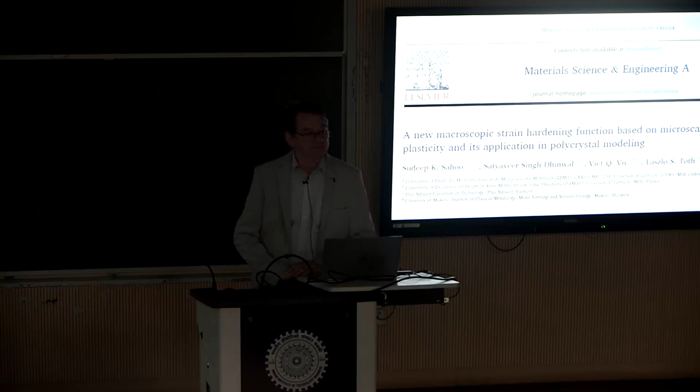So you see even the first slide, which I put on here, it begins with two Indian names. Both of them were almost 100% my doctorate students, and then they were also in my laboratory. And there is one Vietnamese and myself. Now I like to be at the end.

You know, initially, when you start writing papers, you are supposed to be the first one. But then the best place is when you are at the end, because it shows that you are directing and helping all those people who are before you. And this is what I wish you to arrive at when you become older, to reach that position, the final one, not the first one.

So I'm sorry, my voice is a little bit disturbed. And that happened during the trip. Actually, I lost my voice a little bit. I wish I lost my luggage instead; luggage is not that important, but voice in our field is very important. Well, it's okay. I'm not going to sing. I'm just talking about science.

So there will be a number of lectures, and different topics will be touched, but I was consulting Professor Suresh about what is needed here, so that we can orient it a little bit. During my research, I was dealing with quite many different subjects, so I could fit the topic a little bit to your interest as well.

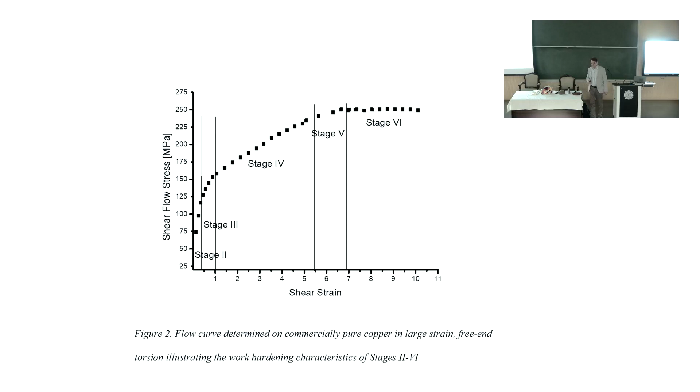Strain hardening. Here is one example. That's a large strain hardening curve, which was taken on copper. And the shear strain, you see, goes up to 10 or 11, very large strain. Usually my topic is the large strain domain. Material forming usually requires large strains. So for technical applications, technology, this is what we have to study, and we have to be able to understand

all these different stages. So this was done in torsion, which is a simple shear process, unless during torsion the bar is changing its length. And there are some length changes if you twist a bar, a small second-order effect. Here only the shear strain is shown, and the shear flow stress at the outer surface.

This was a bar. So this is a large strain experiment, and you can see that one can identify up to 6 stages. But stage 1 is not there. It begins with stage 2, because I am classifying the different stages as it is done for single crystals. But in single crystals, usually you do not get to such a strain, so there are additional stages.

So stage 1 is a kind of single slip stage, which in a polycrystal, and this was a polycrystal, of course, is only working at the very initial stage of the material, negligible. It goes into a kind of stage 2, which is a small linear stage appearing at the beginning of the deformation. You see it is not more than 0.4 shear strain.

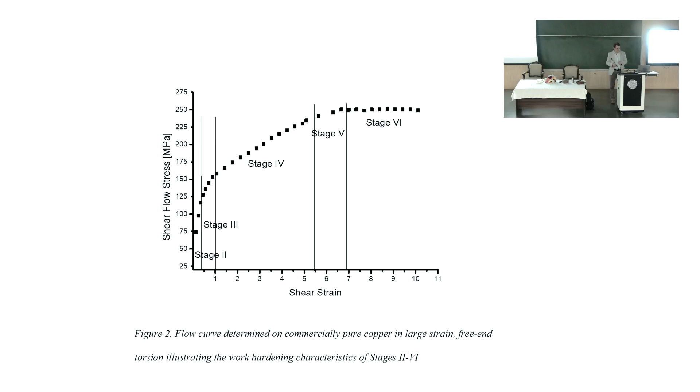And later, scientists who want to understand from the very beginning why it is so went into modeling, simulation, and this is what we are doing now. But we have to look into the history of this strain hardening fitting and simulation, because as you will see as a function of time, it begins with 1909.

Ludwik and later Hollomon were proposing this very simple function. This is just a function which can describe, not fully, but some part, usually the initial part, and especially stage 3. Stage 3 can be described with such kind of function. So all this is fitting. Swift, 1952, I was born in 1952. A little bit modified, you see, by adding a constant here, basically about the same thing.

And then Voce, in Spanish they say voce, we can say vos. The Voce approach, 1955. It's a little bit more complex. It includes an exponential function. This is just a power function here, and this is exponential. And the number of parameters is increasing, because here we only have 2, here we have 3, here we have 1, 2, 3, and 4. 4 parameters. So it's getting more complicated, but it's still okay.

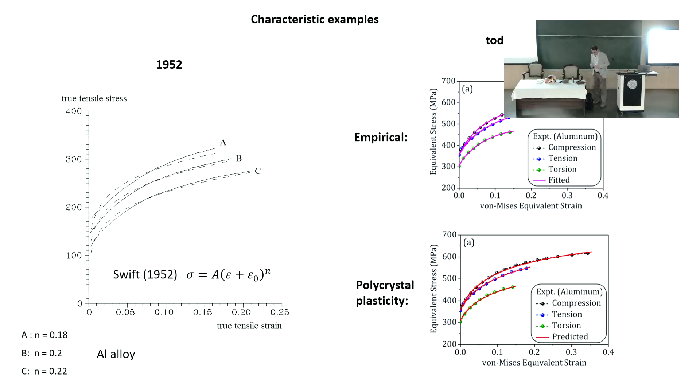Yeah, just to impress you, to show you the progress, what is happening in simulation. So in 1952, we are with Swift. This is the function we try to fit on the material. So the fitting is the broken line, and A, B, C are three different tensile test curves on an aluminum alloy. Well, the fit, you see, it is fitting, but not fully. There are deviations, of course.

And then today, with this function, what we are proposing, it's also just fitting. Okay, you fit, you get the parameters, and this is what you obtain. So here, this is again aluminum, but in compression, tension, torsion, and then the fit is just identical. This is empirical, but then, as I said, the parameters you obtain here in a couple of minutes can be used in a polycrystal plasticity simulation.

When you start the big VPSC modeling, you put everything in, you start your computer, and then you will rapidly achieve another modeling. So this is not empirical. Here you are modeling the physics: crystallographic slip, strain hardening at slip system level, self and latent hardening, orientation change of crystals, shape change, everything calculated. And then you still obtain a fantastic agreement with the experiment. So this is the procedure which I am proposing here.

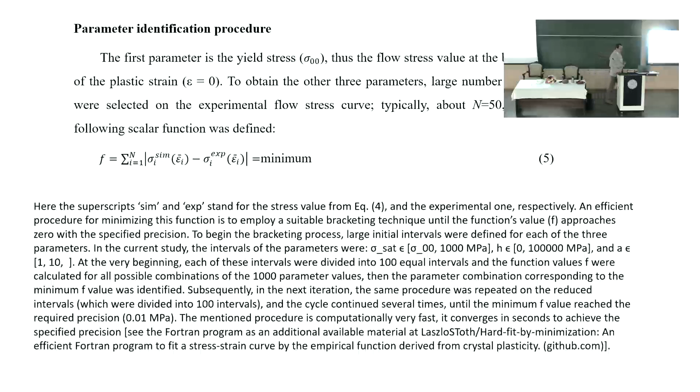So the softening is also possible to describe with this function, but by construction, this term here has to be positive in the original function. But if we make it negative, in that case the saturation stress is going to be lower than sigma 0, and this becomes positive. So we get a very similar function for describing softening. This has not yet been tried. So those people who work on high temperature strain hardening could try that. I hope it is also working so well.

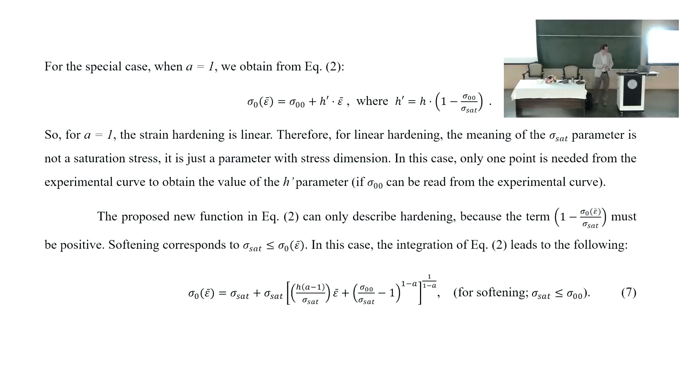So let's see now what results we can get by this process. I am going to show you a couple of applications. So basically the exponent A depends upon the shape of the hardening curve. Yes, that describes the shape, mostly. The H is how fast is the hardening. The A is the shape, and the saturation value is the saturation. So it has a little bit of geometrical meaning.

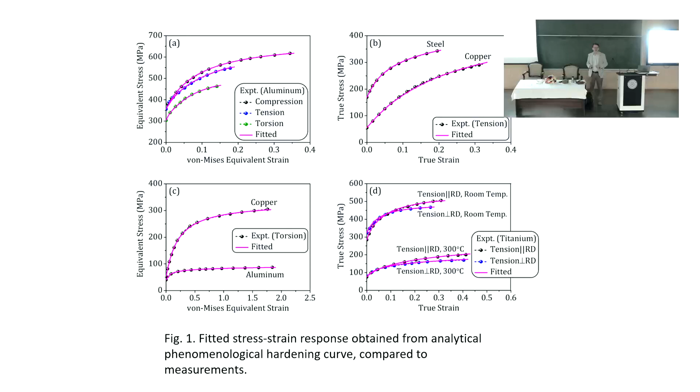Now to go to the polycrystal simulation capacity, we have to do some kind of adjustment. We are only going to use this fitted function to get an initial guess for the polycrystal plasticity simulation. So for that purpose, we are going to use the Taylor factor.

The Taylor factor, are you familiar with the Taylor factor? Put up your hand if you know what the Taylor factor is. Yes, many of you know. That belongs to crystal plasticity. I will show you what it is, but it is how to go from the microscopic stresses to the macroscopic ones. Basically, this is the Taylor factor. It's relating the local shear kind of values to the very macroscopic sample properties in terms of strain and also in terms of stress.

This is needed because the modeling work is done with a lot of physics. So we go to the crystal level, crystallographic slip, dislocation densities, many things which are at microscopic level. But finally, by doing all this, we get macroscopic average quantities as well, and that is comparable to the experiment. And we get even the so-called orientation distribution of the crystals, the grains which make the polycrystal, that you can also compare with the experiment. It is measurable in experiment, and one can also follow its evolution by simulation. And if all this is agreeing, then you are doing good science, and you will get understanding.

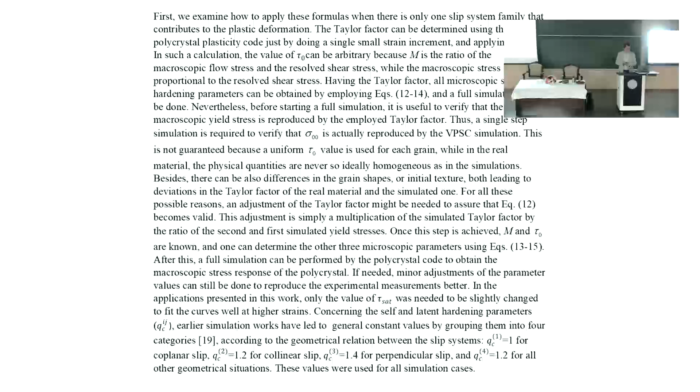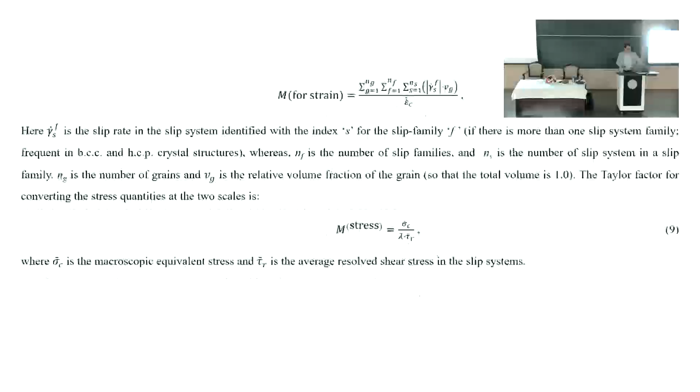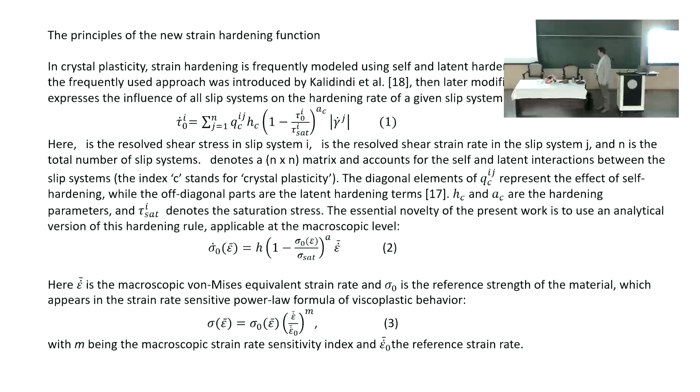Now, this polycrystal plasticity simulation is quite tricky, because, as I said, it is using a much more sophisticated hardening rule. That hardening rule, I'm going back to the initial slide, which showed how we started. This is the hardening rule we have to use in crystal plasticity simulation. So it has the same parameters, yes, but there is Q C IJ. These 144 coefficients. So to deal with that, for a long time we have been using an approach in which this is simplified into 4 categories.

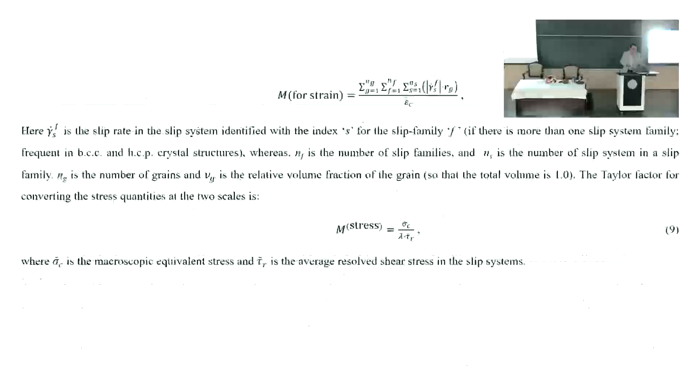So I will show you, here it is discussed. So that Q value here, there are only 4 categories, indexed 1, 2, 3, and 4. This is for self and latent hardening between 2 slip systems, meaning self-hardening because there is strain in that very same slip system, so strength is increasing. But that slip is making dislocations which are meeting other dislocations made in other slip systems. So there is this cross effect of self-latent hardening. That's why it's geometrical, basically. For me, this big matrix, Q C IJ, has a geometrical meaning, mostly.

So by taking 4 groups: one group of interaction when two slip systems are coplanar. The other is when collinear. The easiest one, with less interaction, is when it's parallel. And when it is collinear, then there can be more interactions. And when 2 slip systems are perpendicular, that has to be the strongest effect. And then all the other geometrical cases we put into parameter number 4. So we only reduce to 4 parameters.

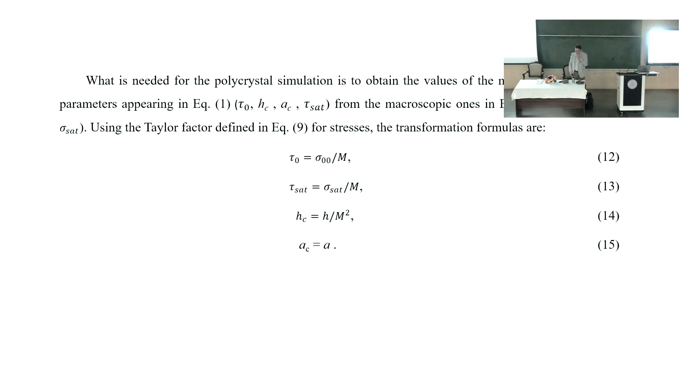He told me, Lars, is there no simpler way for these parameters so that we can have some good initial guess? And this is how the motivation came. Okay, I'm trying to help you. And then this process was invented right after. And then we tried, and he was very happy because it was very efficient and working well. Okay, so now let's see how it is working.

Oh yeah, just one more detail before I show the results here. This is about the so-called equivalent stress. You know, in mechanics, we have only two things to take care about: stress and strain. Strain can be elastic, and you can readily connect it to the stress. Plastic strain is more complex, it's a headache. But basically, those two things we are dealing with. Now, for the strain, there is a common agreement. It's not a big problem.

We use an equivalent strain, which is an invariant quantity, the von Mises strain. It's the second invariant of the strain tensor, or we usually use the von Mises equivalent strain rate, again the second invariant of the strain rate tensor. In any reference system, if you change it, it's the same value. It's very comfortable. There's a common agreement that this is a suitable strain measure. But for the stress, how do we define the equivalent stress?

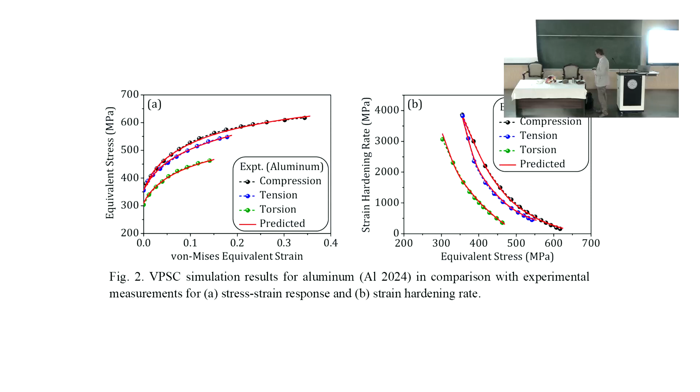So here you see for an aluminium 2024 in different tensile, torsion and compression testing. And here this is the rate of hardening. So the experimental, this is the derivative of the stress strain curve, the strain hardening rate. And this is also comparing very well between simulation and experiment. So that was aluminium, and this one is steel and copper.

Well, for steel and copper now, because this is not empirical, here we are doing crystal plasticity. There was some initial texture in the material, like for the steel or copper, you see, which is different colors in this figure representation of the orientation distribution of crystals. If it's a single color and single value, that means isotropic. But this is not. It's not very strong either, only 1.5 times more than the random. Here it is more, 4.7. It has a strong maximum in the 100 direction.

So this is taken into account in the simulation. You discretize the initial texture into your grain orientation distribution used for the simulation, and then you introduce it, and then it's taken into account in this way. Here the simulation results. If it is not done, actually we cannot get such a good agreement. It's also important to take into account the initial state of the material as precise as possible, which must include the orientation distribution. So again, here the strain hardening rates and the curves themselves are very, very satisfactory.

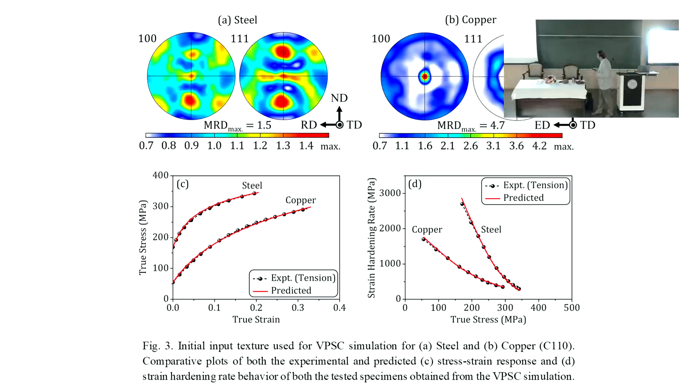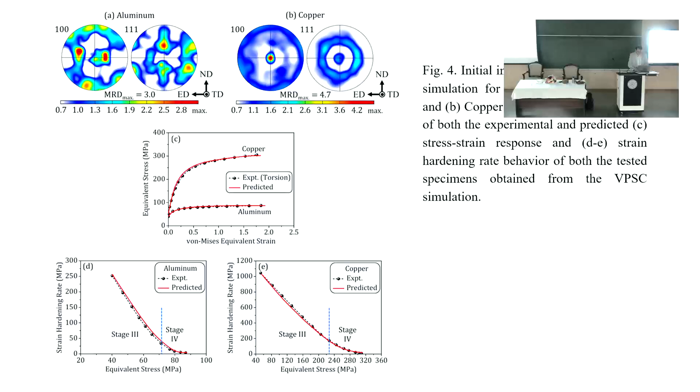And here, this is aluminum and copper. Yes, but for larger strains, these are all the cases I showed before, just for the empirical fitting. And perhaps you find a little bit of deviations, you see. But look, considering the complexity of your modeling, it is perfectly satisfactory. So that's such kind of modeling which is so successful that I hope is going to be extensively used in the future.

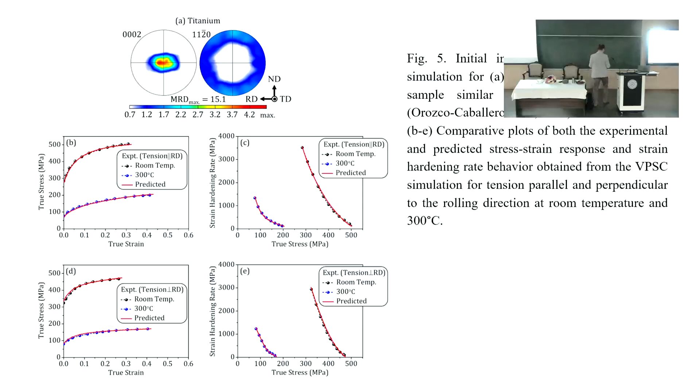So now, of course, if you want to publish a new approach, it's very important to compare with previous ones. Once we did an excellent job. It was on twinning, twinning variants and so on, very complicated. And we got a nice theory.

We sent the paper to Acta Materialia, and it was refused. The reviewer said, how can you propose a new theory without comparing to the old ones? Perhaps the old ones produce the same. So it's very important that you not only produce something new, but you have to work on the old ones, apply the old ones, and check one after the other, at least the best one, the latest one, I mean the most developed one. You have to document that this is better.

Well, we found out who the reviewer was anyway, because he was pointing out which work was mentioned, of course. You mention important works, but to apply another existing theory is not always easy. You have to work it out on your example, you have to realize it. It's a big job. Usually people don't do it, but actually the reviewer was right that it is important.

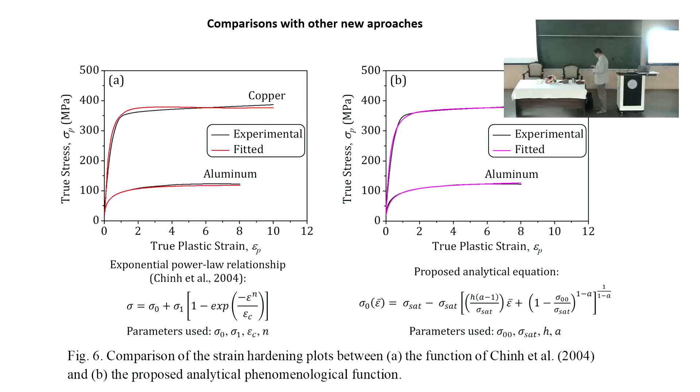So this is, again, extremely important. In this way these authors are happy, because their work is cited and used, and whether it is working less or not is another question. Science doesn't belong to you. There is only one true science. We are doing different sciences, but there is only one which is true.

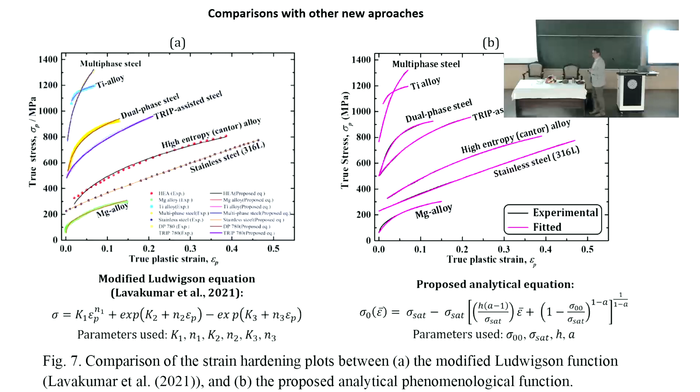Okay, and then there is an empty page and other empty pages, because the work still should be continued here. Especially, I would be happy if somebody would try this strain softening function, which is proposed in this work.